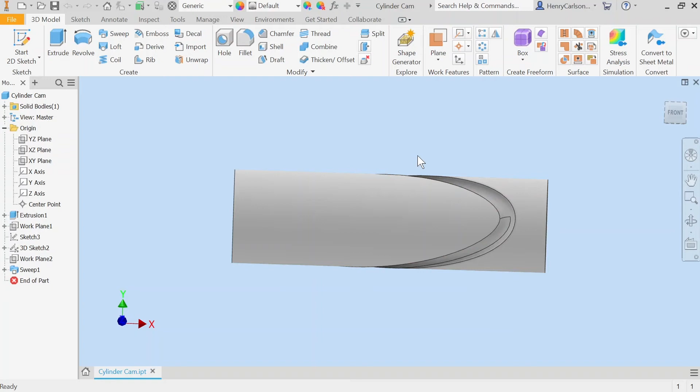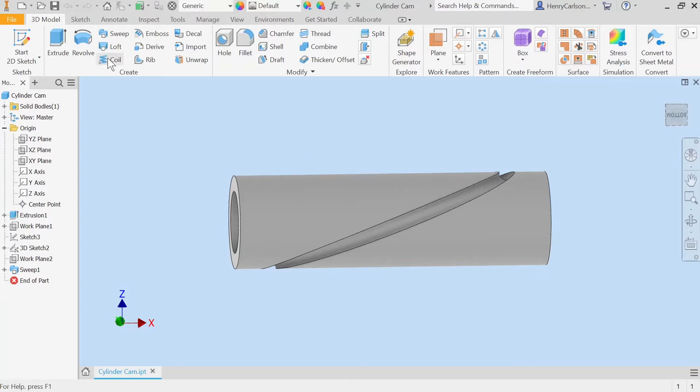Okay, so today we're going to be doing just a basic cylinder cam. This is what the end product is going to look like. It's a cylinder cam, or barrel cam as some people call it, which will move on an axle. It will be able to move something back and forth. Okay, let's get started.

First, we're going to just make the part file. I'm sure you know how to do that. Okay, now let's just make a 2D sketch, throw it on the YZ plane, and then we're going to start off.

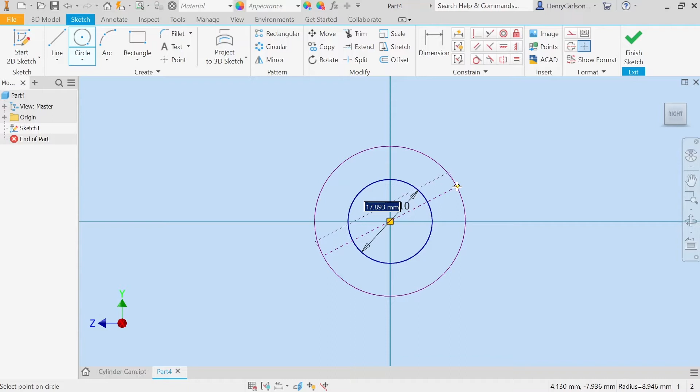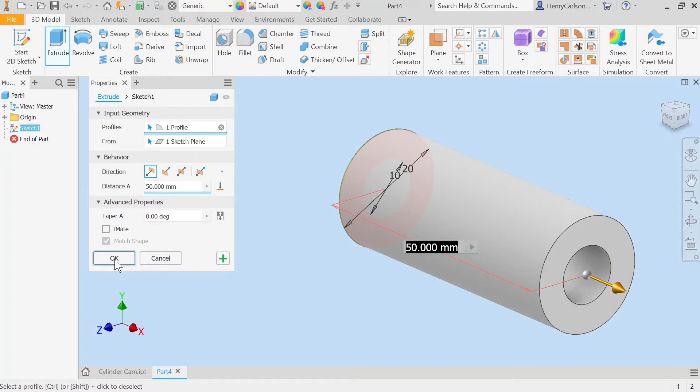by making that cylinder. It's going to be hollow, so instead of shelling it, I'm just going to make the extrusion only the outside. So I made a 10 and a 20. You can of course choose different sizes for these two circles, it doesn't really matter to me. I don't care what you do, but numbers don't matter anyways. You could always make them parametric and change them later. I'm not going to because I don't really want to.

But now I have this. You should be on this step too. It should look exactly like this thing. It's just a hollow cylinder.

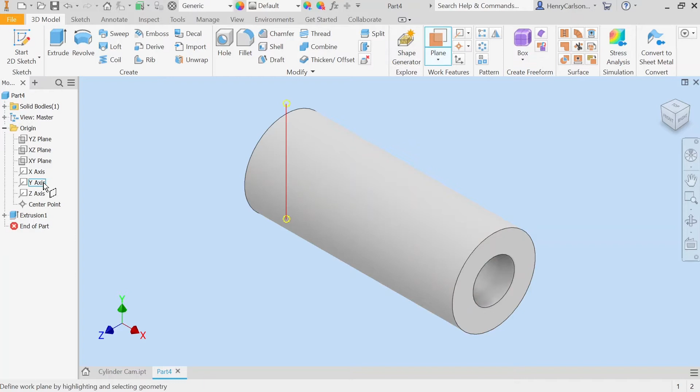Now is where we actually make it into a cam. So we are going to click on this X - just kidding, I did that wrong. We're going to make a work plane. So you click on work plane up there, then XZ, and then make one on top. Okay, everyone got that? Good.

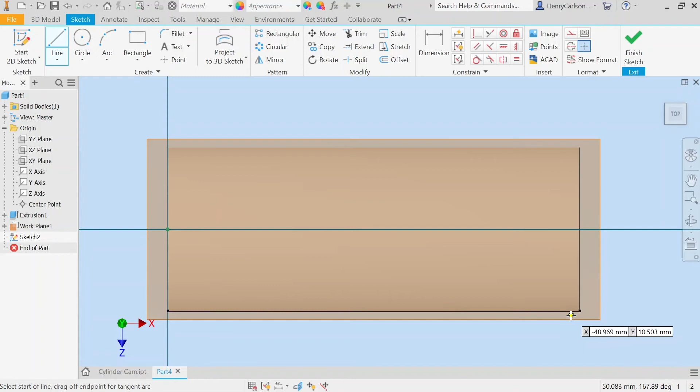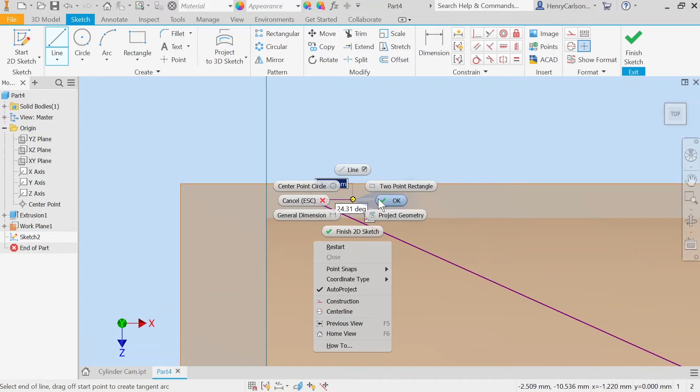And now we're going to make a 2D sketch on top of that, because why else would we have this work plane? Okay, start your sketch. We're just going to make a diagonal across the cylinder, that's the whole idea. Don't put it directly on the edge because that can cause problems. So just pull it a little bit inwards and a little bit outwards. Although you could have it farther inwards, like here, but that wouldn't really optimize the whole size of the cylinder. So just do whatever you want. But I'm going to go here to here-ish. It's not exact science - it can be if you really want to measure it out, but I'm not going to.

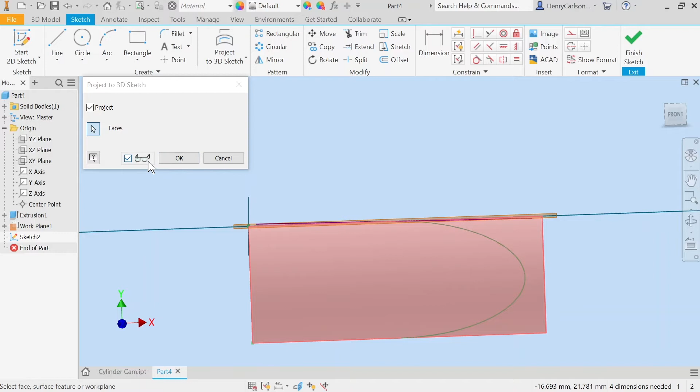Oh whoops, we don't want to finish that sketch, let's go back into it. What we're going to do here is project to 3D sketch. It already knows what sketch we're in because we're in the sketch, and then we're going to select the cylinder as our face. Hopefully you can see that green outline - if not, turn on the sunglasses or whatever they're called. You can see a preview, then click OK. And the green line is now stronger because it actually exists, it's no longer a preview. And then we're done that. So now we have this - this is going to be our railing for a sweep later.

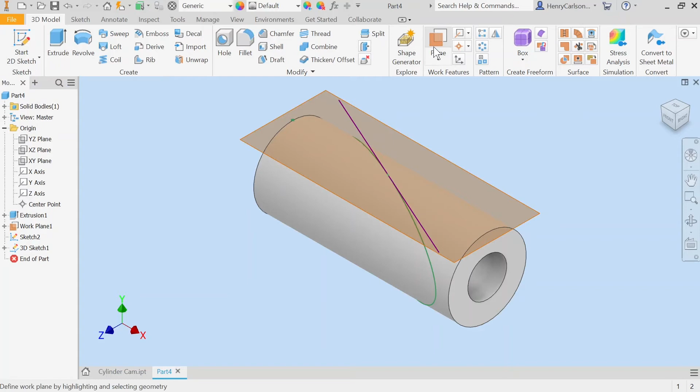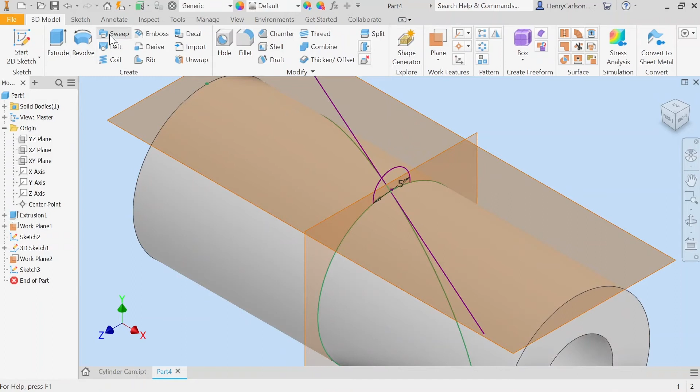But we first have to make the profile for the sweep. Let's make a plane out of it, midpoint between two planes. And then we are going to make a sketch on this plane - it's just a circle right here, and I'm just going to make it 5 millimeters. You can of course make it whatever you want. And then we are going to sweep that thing, but first I need to select my profile, then my curve. Oh, it actually let me do it - that's great. Okay, click OK.

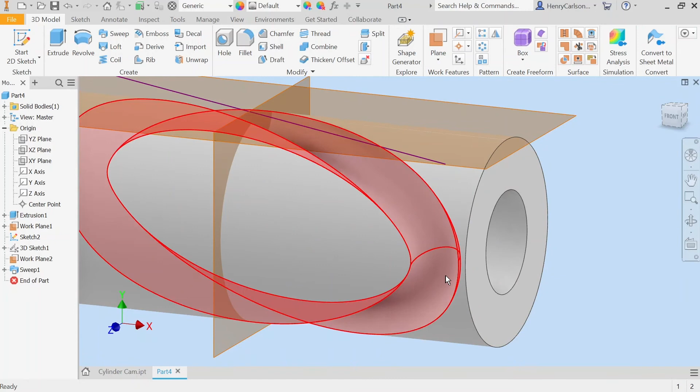See, now we've done it. See, this is what I was talking about though - if you had gone to the edge exactly... I was very close here, but if you had gone exactly to the edge, you might have caused this thing to cut into the edge. Don't do that - if you were doing it realistically, your ball would fall out and it would not work as a cylinder cam. See this edge closer? That's better. That's better. You probably want to give about that much distance realistically. Of course, if you're just using Inventor's simulations this would technically work because they don't care, but realistically you'd want something closer to that.

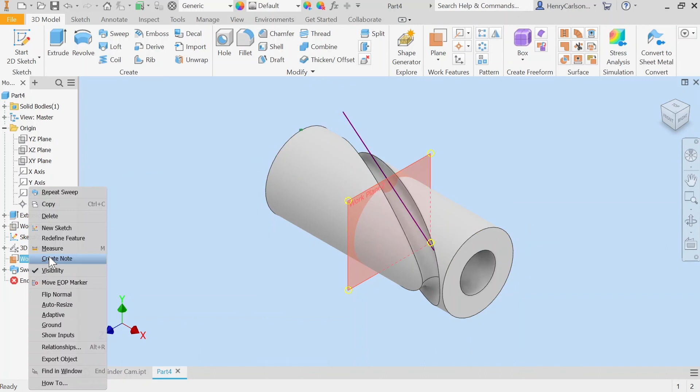Okay, so I'm going to turn off the work planes just to make sure everyone knows what it looks like. This is what the cylinder cam is going to end up looking like. Hopefully you got this far. It's slightly different from my demonstration one because I chose different numbers - just like you could choose different numbers, it doesn't really matter.